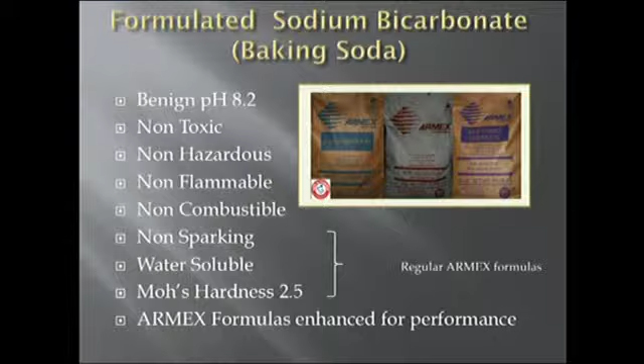We have taken this wonderfully natural particulate and enhanced it for performance, for delivery in a pressurized air or water stream, for cleaning and decoating applications. As you can see, on the Mohs hardness scale, Armex, or baking soda, is softer than all other commonly used grits in abrasive blasting. You may wonder then, how effective can it be? How does it work?

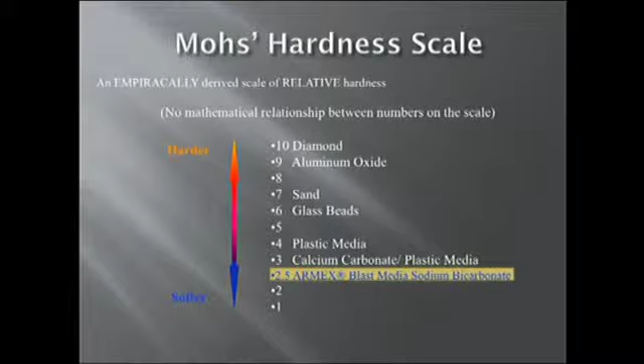It works because it is a soft but friable crystal, very sharp and very angular. When this friable crystal strikes the surface, it fractures into many more tiny particles. It is pulverized by the impact on the surface. Two phenomena result: one, the energy generated at this point is the force that actually removes the coating or contamination from the surface; and two, the particle is rendered to dust.

This is one of the primary differences between Armex and other grits. Even grits considered friable, like glass bead and plastic or agricultural media, maintain their integrity unless you're operating at pressures over 45 psi or 3 bar. Only then do they begin to fracture. Armex will fracture at the lowest of pressures, 5 to 10 psi, or fractions of a bar. We will touch on this point again later in the presentation. Remember, this is the key attribute that preserves the base material.

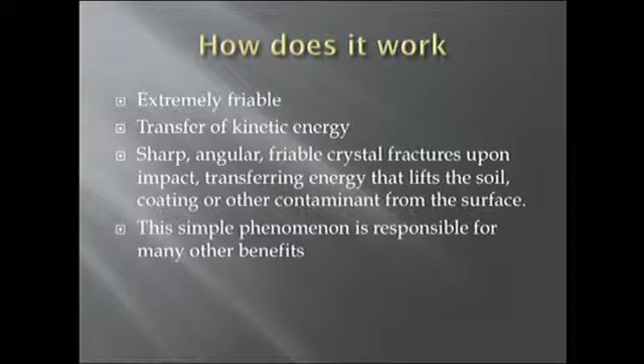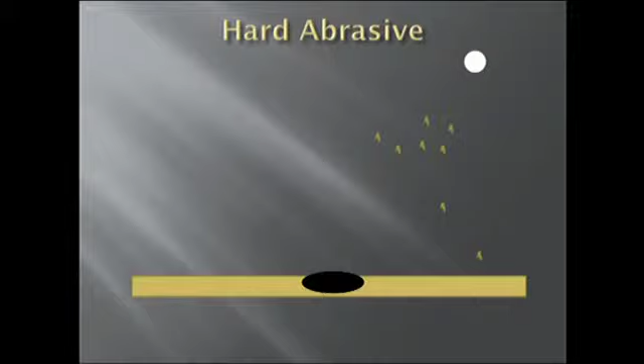As you can see in this animation, the hard abrasive particle maintains its shape and upon impact not only removes the coating or the soil, but also part of the base material, leaving either a scrape or a pit. Armex, on the other hand, fractures upon impact, releasing all of the energy upon the surface. That release of energy removes the coating or soil, but there is nothing left of the particle to cause damage to the base material.

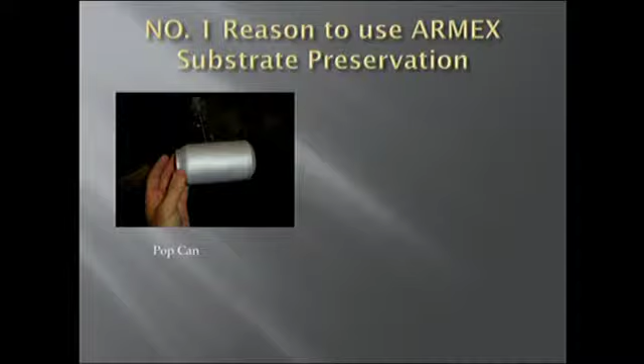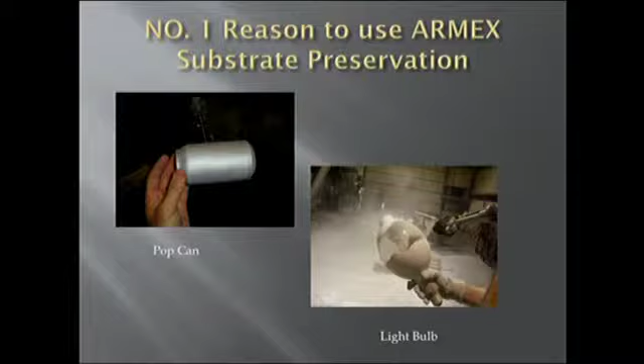For those of you who are not easily convinced, here is an aluminum soda or pop can, completely stripped, without damage, warping, pitting, or exploding. And on the right, for those who need further convincing, is a light bulb. Now all that's great, but I know you're not stripping pop cans and light bulbs, so what's the value?

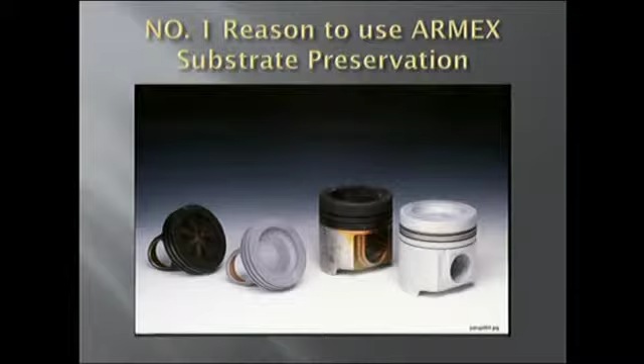Here are some more practical applications: before and after photos of steel crown pistons on the left and aluminum on the right. As mentioned, you can preserve the surface material, but the other thing you can do with Armex is eliminate steps.

If your process usually requires a pre-wash, ask yourself why. Usually, your pre-wash is to remove gross contamination so that it will not contaminate the recycling media. Armex, on the other hand, is a one-pass media. You remember that it returns to dust on impact. There is no recyclability—you are always using virgin material.

Now you're wondering, how can that be cost effective? Well, number one, it is less expensive to begin with than many of the other grits used, like glass or plastic. It also uses a very lean stream of material. It operates at very low volume rates, as little as a half a pound to a pound per minute in contained applications.

Also, when you're working on a very tenacious soil, other grits will lose their recyclable value at pressures over 45 psi, which can also result in damage to the surface. Therefore, you must dwell at these lower pressures on the surface to get the results you want.

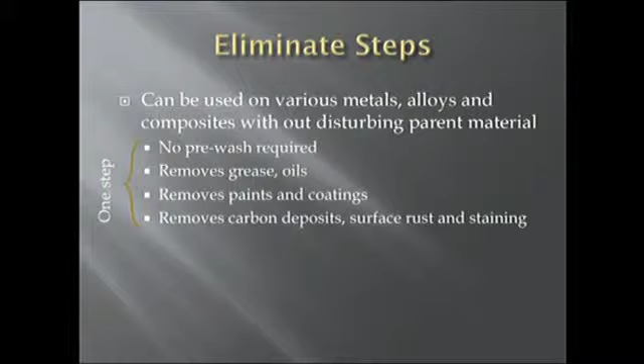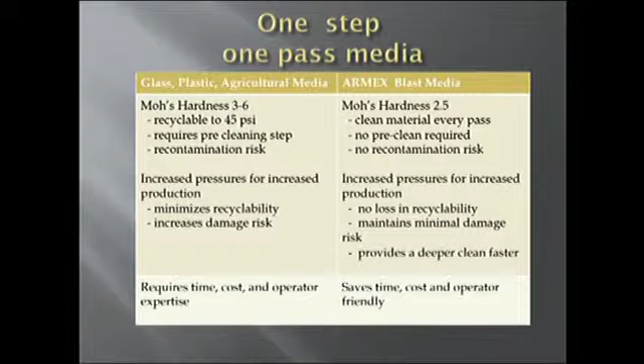So, to review thus far, Armex is a baking soda-based abrasive. It's soft and friable, making it a one-pass media. This assures the use of clean material every time, eliminating the need for pre-wash and the risk of recontamination. It also allows for increased operating pressures to be more aggressive on tough soils, providing a cleaner part faster with minimal risk of damage.

Lastly, it's water soluble. This is of paramount importance to engine remanufacturing for the aerospace industry and certainly has great value for the auto industry as well.

Particle ingression resulting from the use of other grits often requires detailed work on both ends of the cleaning process. Care is taken to prevent ingression using barriers such as tape and dowels, and more importantly, detailed inspection is required following the blast operation to be sure no particles are left behind, which can lead to, at best, warranty issues, and at worst, catastrophic failure.

Armex is water soluble and can be flushed clear of the part with a thorough rinse. It can be flushed clear of the most complicated contours, passageways, and fuel lines. This attribute also makes it a highly effective method before any type of NDT testing, exposing material flaws easily and completely without crack closure. Again, saving time by increasing throughput.

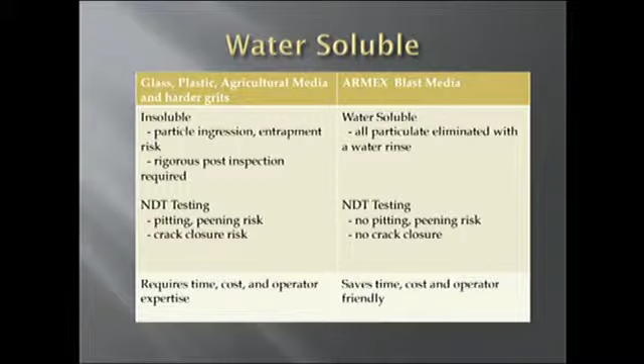As you can see here, Armex provides a cleaner, brighter, like-new surface. One happy Armex user, Kevin Anderson, Senior Process Engineer, remarks, 'It's getting so we can't tell our newly casted parts from the parts cleaned with Armex.'

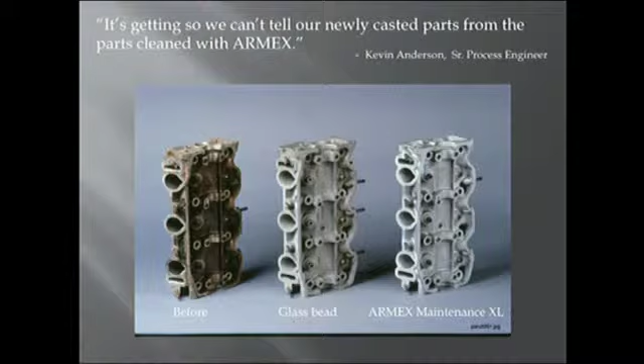It is safe for use around rotating equipment and movable parts, even safe for use around bearings, valves, and pumps. In certain applications where conversion coatings need to be left undisturbed, this too can be accomplished using Armex.

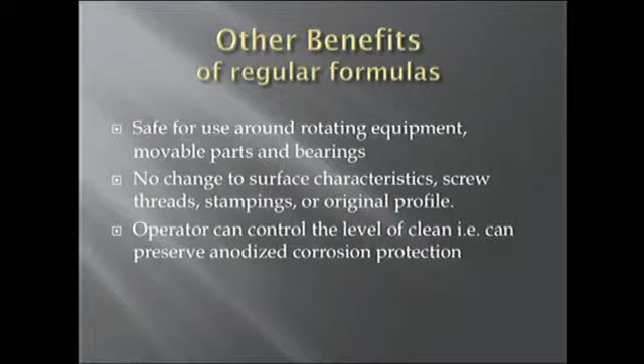There are other benefits of using this benign water-soluble material as an abrasive. For example, leaving a residue on a steel surface will inhibit flash rust. Remember, however, that all residue must be removed before applying a new coating.

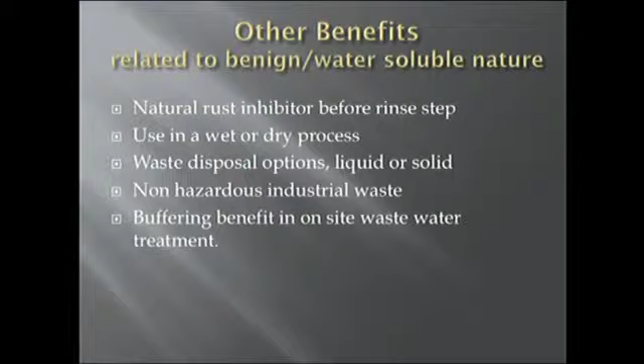The Armex material can be used effectively and efficiently in dry and slurry blast systems. And the waste stream can be handled dry or as an effluent. In most cases, the dry Armex waste profile turns up as a non-hazardous industrial waste, which can be disposed of in a sanitary landfill. Armex waste can also offer a secondary use in wastewater treatment.

While we have focused on engine rebuild markets, Armex can be applied to a myriad of industry applications, such as petrochemical, oil and gas field applications, paper mills, food and beverage processing, Anilox roll cleaning for the flexographic industry, even microblasting for the electronics and medical device industries, just to name a few.

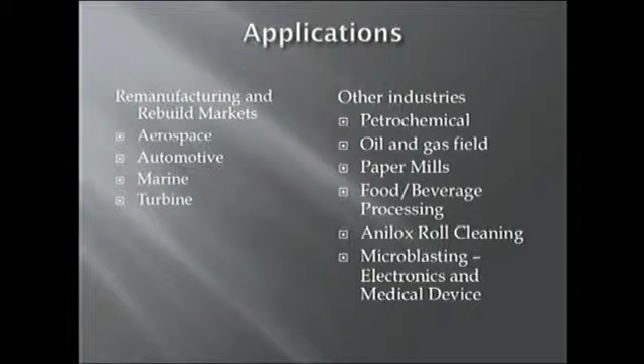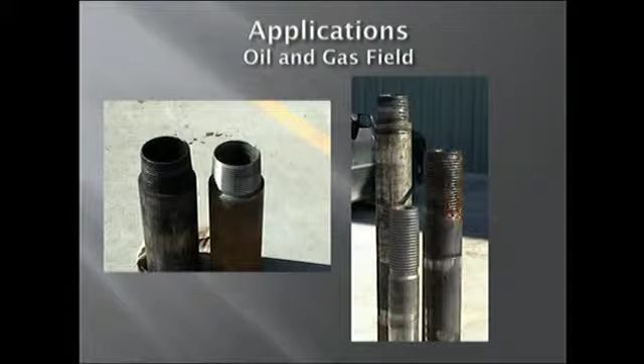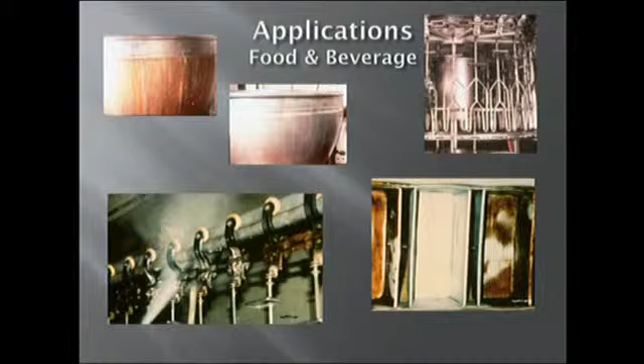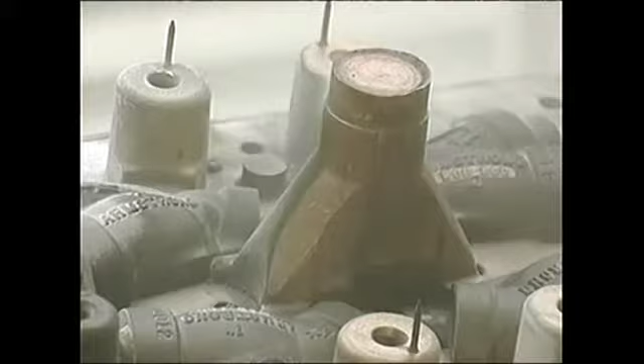Armex is used in both portable and contained applications. Let's watch now how Armex used in a dry blast cabinet cleans these manufacturing molds.

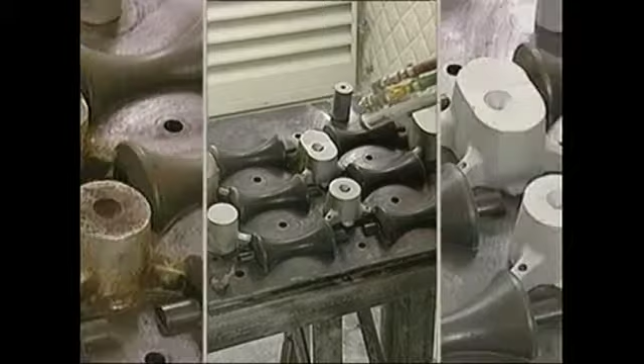Both of these molds are from the auto industry. The bottom mold is for making steering wheels. Armex allows repeated use for cleaning molds because it helps maintain the integrity of the mold so that it may be used, cleaned, and used again repeatedly.

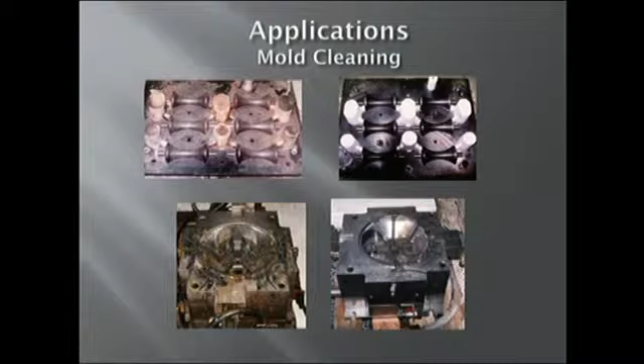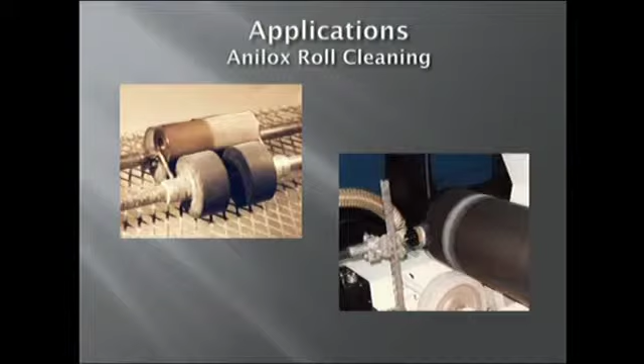In some industries, operations are automated. Here, the nozzle traverses the length of an Anilox roll at a constant standoff distance and pressure.

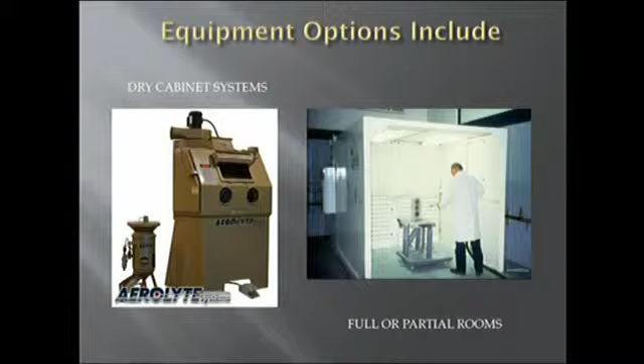There are many equipment options available, particularly for contained blasting. On the left is the Aerolyte bicarbonator from Clemco. On the right is a modular unit that can be built at any length or depth to meet your requirements. There are also full rooms available for blasting.

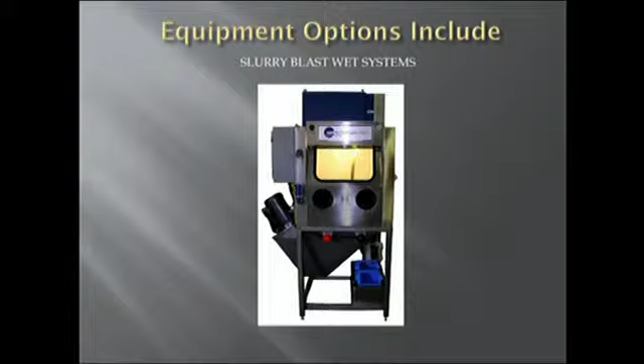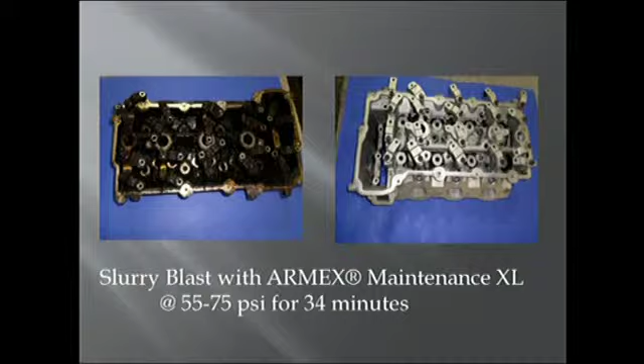Slurry blast or wet systems are also highly effective. This particular unit from Wet Technologies is used in many remanufacturing applications. This process was using a Slurry Blast Wet Technologies booth with Armex Maintenance XL. This part is completely cleaned of heavy residues despite its contours and through holes. Watch how Armex performs in this slurry blast cabinet from Wet Technologies.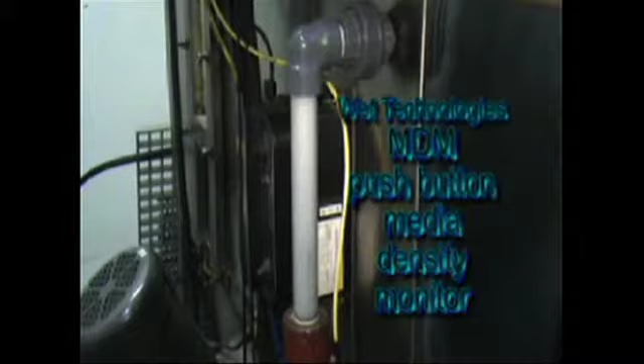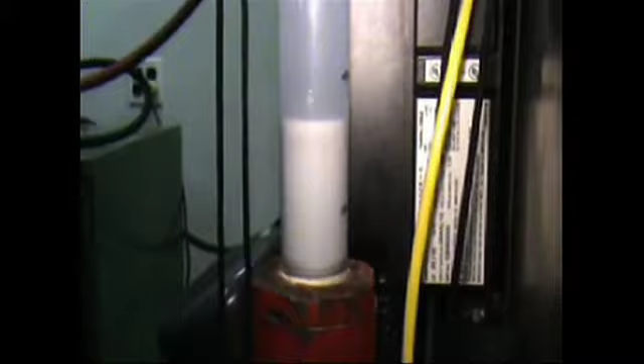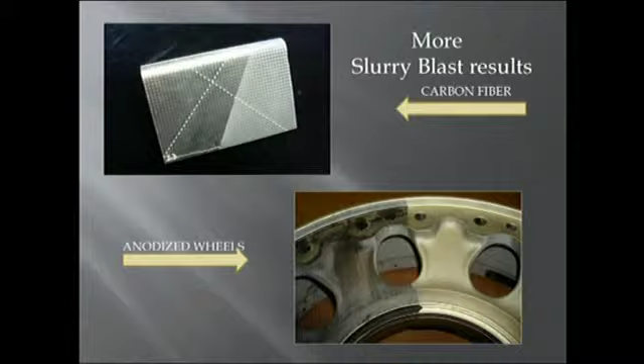Other applications using the Wet Technologies systems include carbon fiber surface preparation and aviation anodized wheel cleaning without removing the anodize.

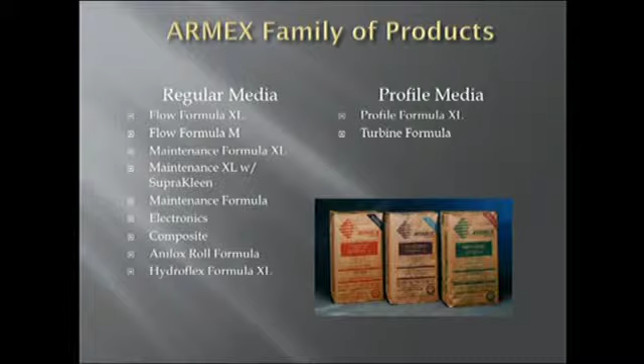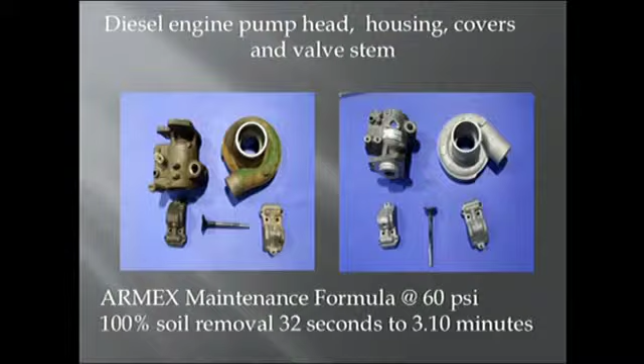Armex has a full line of abrasives engineered for specific application results. Profile formulas can remove heavier corrosion and carbon deposits. Here, using the Armex maintenance formula at 60 psi, we have 100% soil removal in as little as 32 seconds to 3.10 minutes.

Turbine formula is a favorite among engine builders. As you can see, Armex can deliver a like-new part.

Chris McGinnis, process manufacturing engineer, states, "You can't hand detail and get as clean as you can with soda."

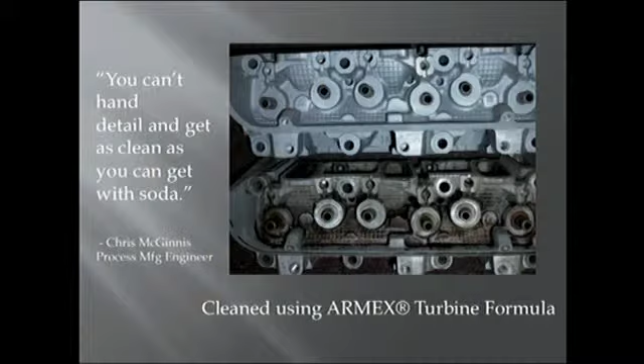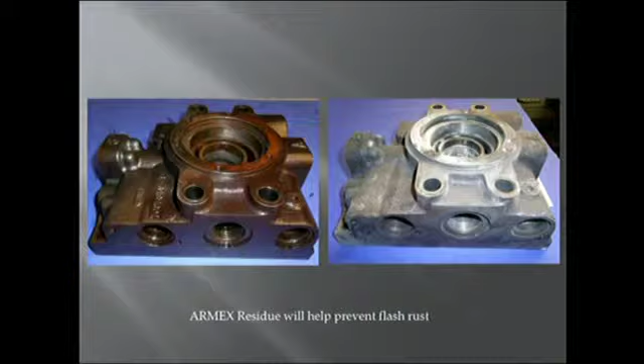Another interesting benefit of Armex, due to its pH of 8.2, is that you can leave a residue on steel surfaces that will prevent flash rust. In this particular case, the rust was removed, the residue left, and the part shipped back to the customer, who would then remove the residue before moving on to the next step in their process.

There are so many good places to use Armex that force-fitting it is an inefficient use of time and energy. It is not a panacea, and there are places where it just won't shine.

Heavy rust removal, where you require a deep surface profile, or where your parts are of little or low value and can be cleaned in a bulk cleaning system.

Because Armex is a line-of-sight operation, it is not usually compatible with complex automation. And certainly, if there are no environmental, worker, or safety concerns, which is certainly rare, there may be other options, including chemicals, to do the job.

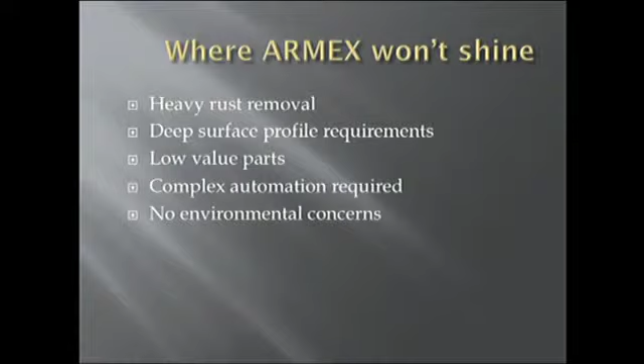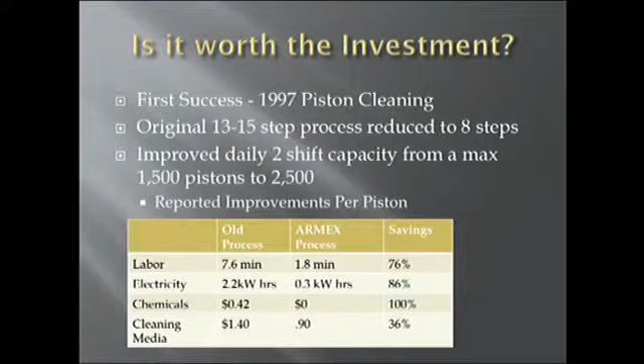So now that you have an idea about how it works, I'd like to share with you how Armex can improve the economics of your process. Our first efforts delivered greatly for this end user with regards to labor, utility use, chemicals purchased, and improving their throughput. Another core remanufacturer began using Armex in 1998.

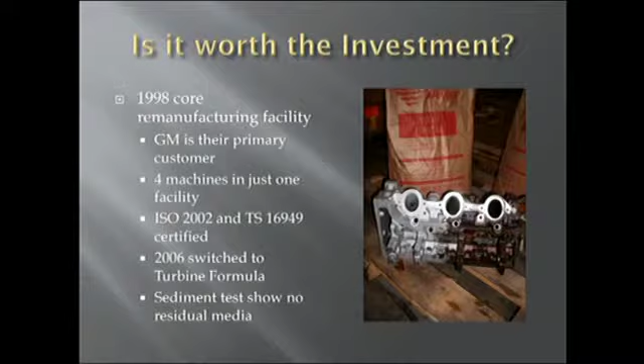They have 4 machines in just one of their facilities. In 2006, they switched to turbine formula, which is one of our profile blended formulas, to achieve a higher level of clean and a like-new part.

Is it worth the investment? As you can see, this customer eliminated steps, improved output, and found that their paint cure rate improved from 1.5 hours to just 45 minutes. While we are still investigating this phenomenon, we believe it is due to the intense level of clean on the surface.

This customer started with just 1 machine and within months ordered 2 additional machines for their facility.

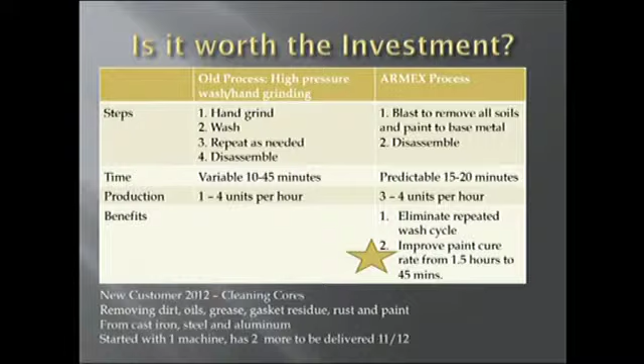You always want to know how the process is going to impact your employees and how well they are going to adapt to the change.

Well, one of our customers said, "This one is easy. The operators really drove the change after our visit to the distributor for the demo. We put the equipment in place and the operators ran with the changes and improvements." You can't ask for much better than that.

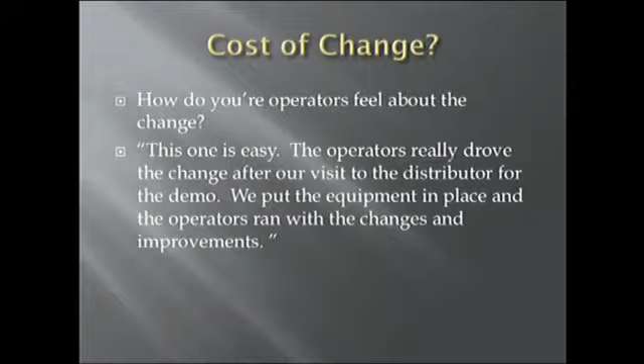Can I use Armex in the equipment I currently have? Armex can be used in any equipment manufactured for baking soda blasting.

You may even be able to get results with conventional sandblasting equipment, but systems designed for soda blasting will certainly improve performance and cost efficiencies. Pressure systems will generally work better than suction systems.

We also recommend that you investigate the use of the Armex performance nozzles, especially if you are trying to strip heavy coatings. Most cabinet systems are designed to recycle abrasives, but Armex cannot be recycled, as it is extremely friable and breaks down at any pressure.

There are two consequences of this that are addressed in a soda cabinet but not in conventional recycling cabinets. First, the visibility around the workpiece may be greatly reduced. This may not be a problem doing one or two pieces periodically, but if you're interested in production blasting, you need the visibility.

Secondly, the dust collector may fill prematurely. As stated, Armex breaks down on impact and is therefore considered a one-pass media. That means all the debris and spent media would bypass the cyclone separator and go directly to the dust collector, blinding it prematurely. In a cabinet system designed for soda, the cyclone drops out most of the debris, waste, and spent media into a drum, and only the very fine particulate goes to the dust collector, prolonging its use.